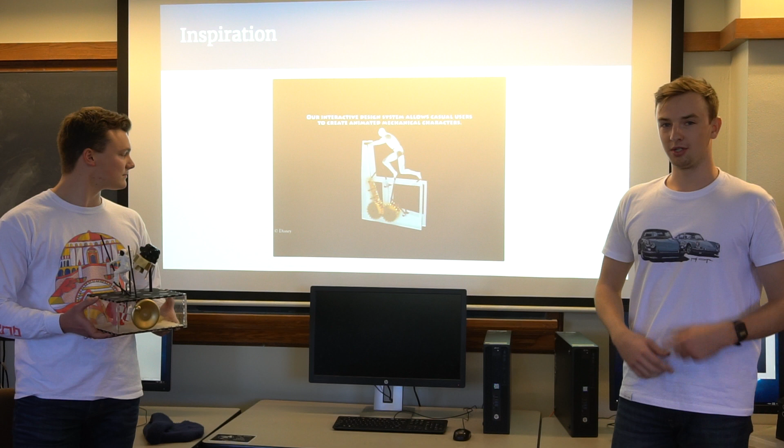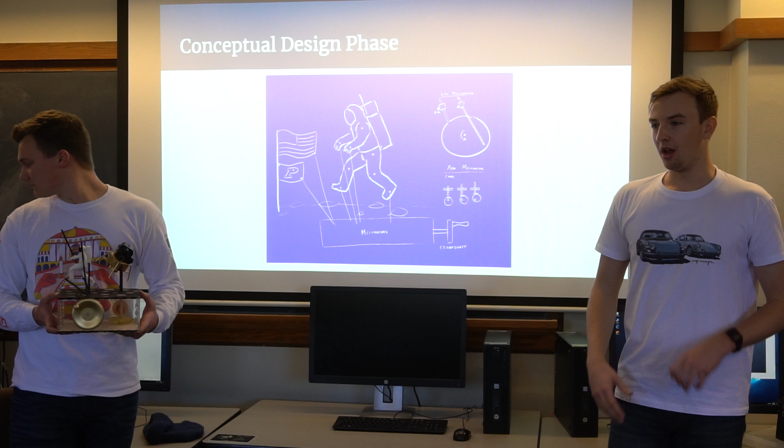So let's kind of start talking about where we got our inspiration from. There's this awesome Disney mechanism YouTube video that you guys should watch the full thing of, where they create really cool actions based on mechanisms, turning angular motion into linear motion and so on. So we wanted to replicate this, and you can go to the next slide. We wanted to replicate this type of motion and create an astronaut that would leap across the moon.

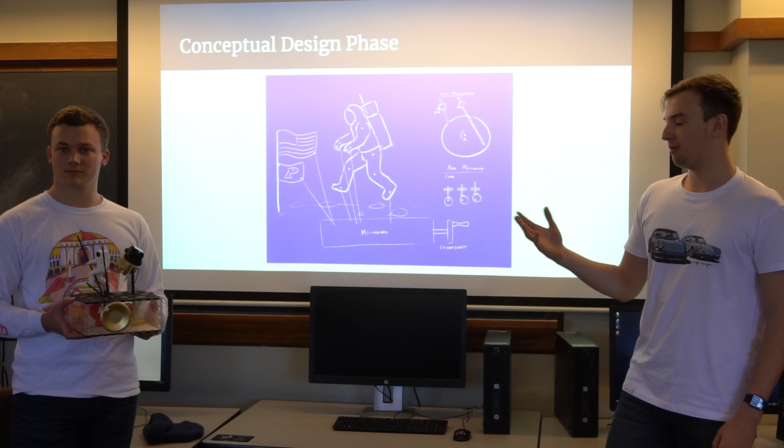So what we did was we kind of came up with some ideas, sketched it out on paper. We wanted it to look sort of like this, and then we'd have this mechanism box underneath which would hold all the parts that would create this motion. And then we also added a lunar module that rotates in the background as if it was taking off. So next slide.

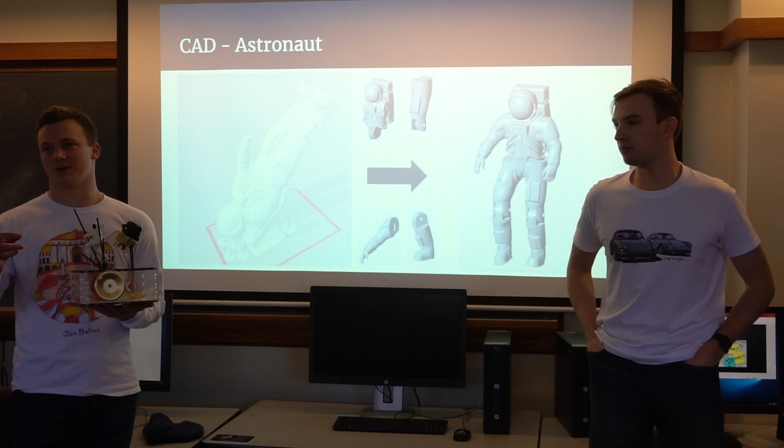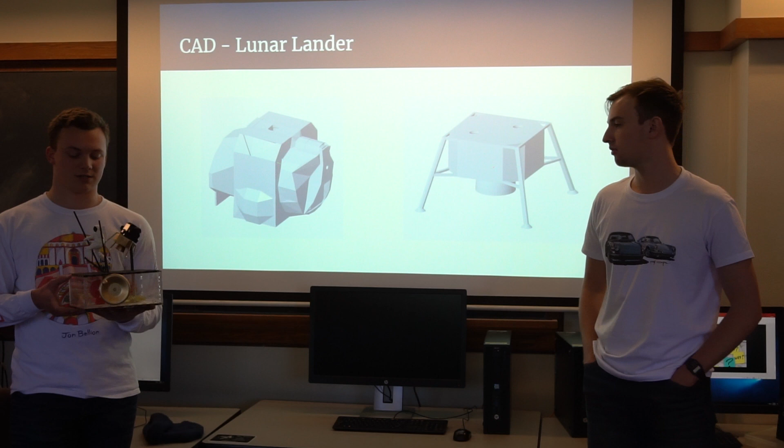So what we did for the CAD of the astronaut was we found an STL file which was open source, and then quite heavily edited it. We had to take apart the different joints and remove the supports, and then we printed the joints separately from one another and attached them into the assembly that you see here. And then the lunar lander was a similar situation, open source, and we made small changes so that it would fit on our model and move the way we wanted it to.

And so here's a basic assembly of our toy. At the moment, it currently does not have an animation to it, but we are working on that for the final toy presentation next Monday. And so what you see here is rods connecting the arms and the legs to a hidden crankshaft inside the box. And on the right face of the box, you see a red lever. You turn that lever, it turns the crankshaft, moves the rods. The astronaut is animated like he's walking on the moon. And at the same time, the lunar lander in the background is spinning.

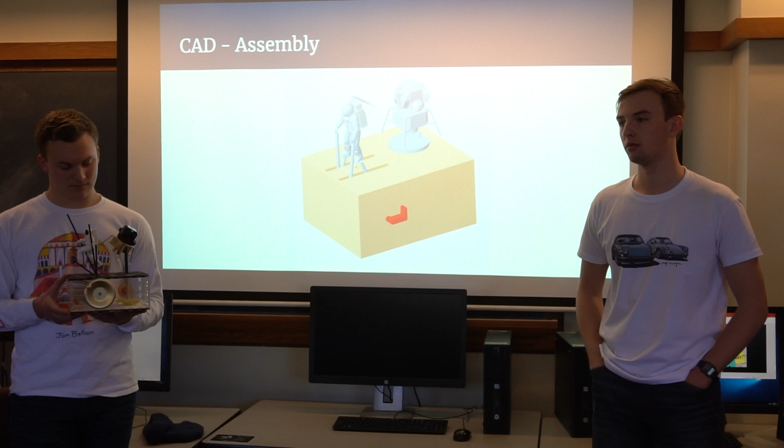So once we finally had everything modeled, we went to 3D printing. We did the lunar lander and a few other parts with SLA 3D printing. And once we ran out of the volumetric limit on that, we used FDM to do the astronaut parts. In addition, we used laser cutting for the box that houses the crankshaft. We decided to use 1/4-inch plywood for the top and the bottom, and then for the sides to use clear acrylic so that you can see the crankshaft and see how it moves. It also kind of gives the kids who play with this an inspiration for mechanical devices.

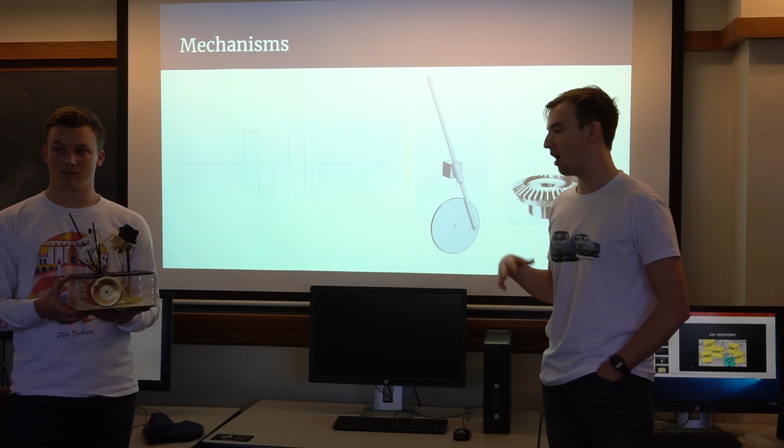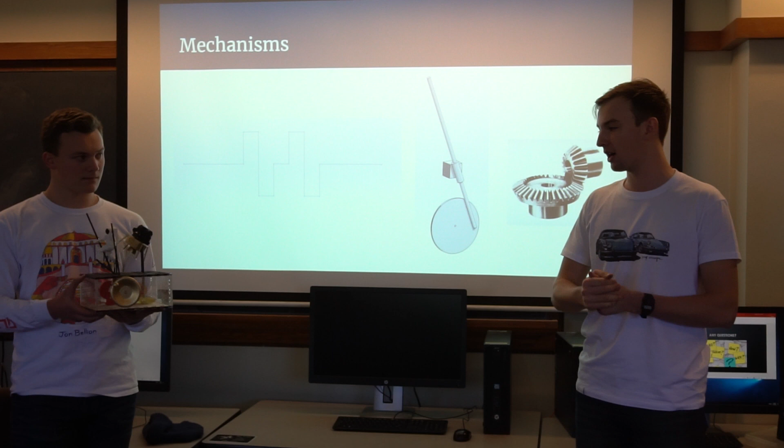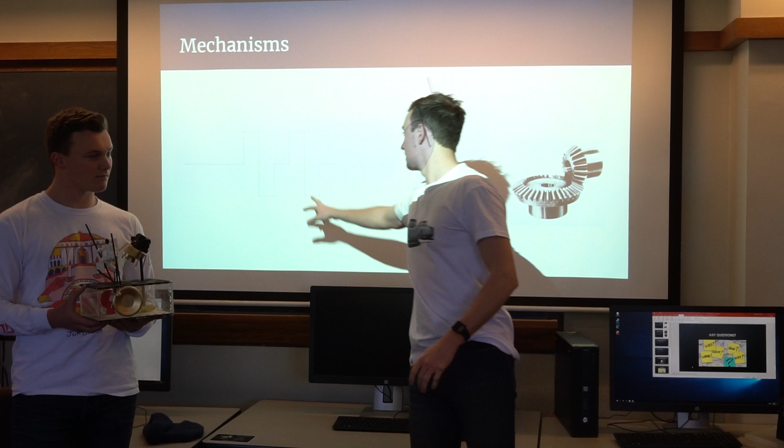So we'll talk a little bit about the mechanisms. First, really quickly, you have an input source, which is the user or the child, who rotates the handle or disc, which is on the outside of the box. That in turn rotates a crankshaft. So the way we designed it here is the two inner cranks here control the arms. When you walk, you have opposite strides, so we wanted the arms in opposite directions. These two in the middle, and then the two on the outside operate the legs. And obviously, when you walk, your legs are in different strides, so they're going to be completely opposite one another.

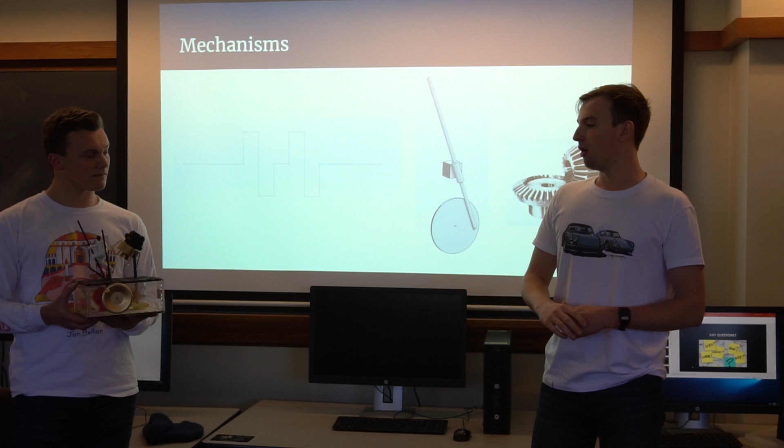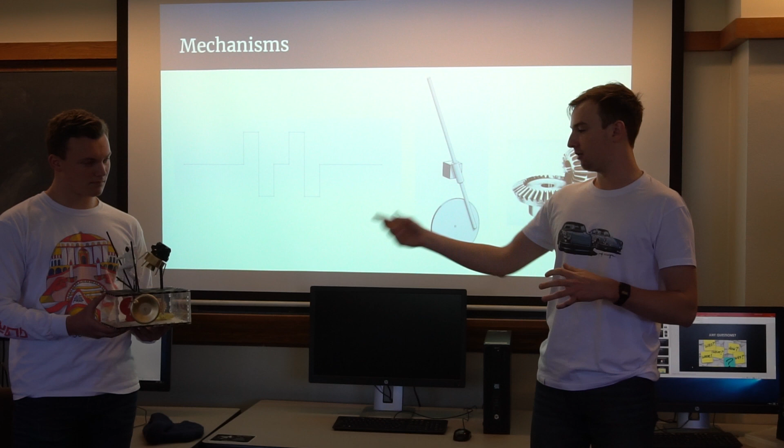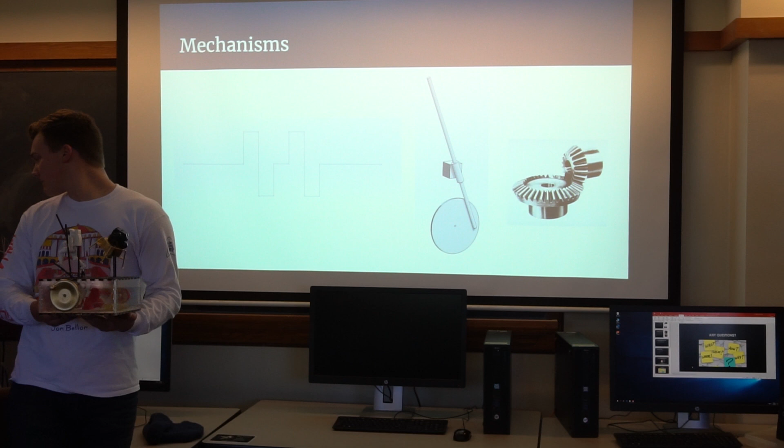So then based on that rotation about the center, it moves almost like a piston in a car, up and down, which then moves the arms and legs in a skipping motion. Now, that crankshaft is also connected to a pulley system. The pulley system then rotates one of these gears, translates the angular motion 90 degrees, and then in turn rotates the lunar module at the top. Just to show you, I used SolidWorks a little bit to help visualize and adjust these lengths so I could figure out the proper radius, and it moves in that action.

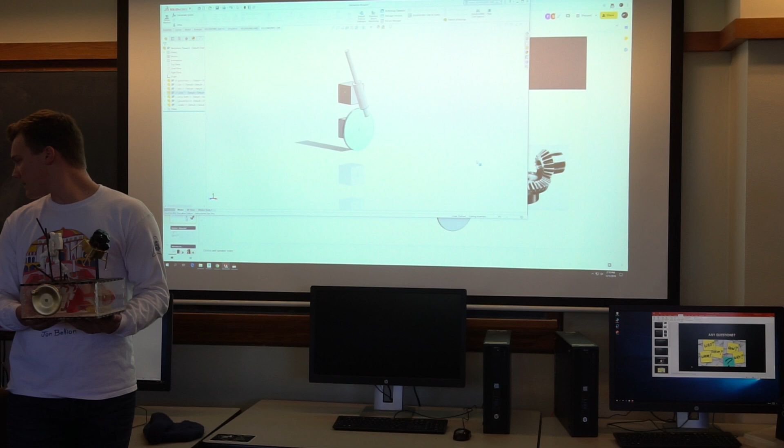Next, we're going to talk a little bit more about the skeleton model. Right, so as we were learning in class how to make skeleton models, we decided it would be a good way to model our mechanism, figure out all the joint lengths, and then adjust them as needed as we continue to make updates to the prototype.

So we made a complete skeleton model. We put in all the joints and connectors between them. It's a three-dimensional skeleton, which also has working mechanisms for a cam follower, for the slider joints, for the bevel gears, and for the pulleys. We are facing some issues with this model.

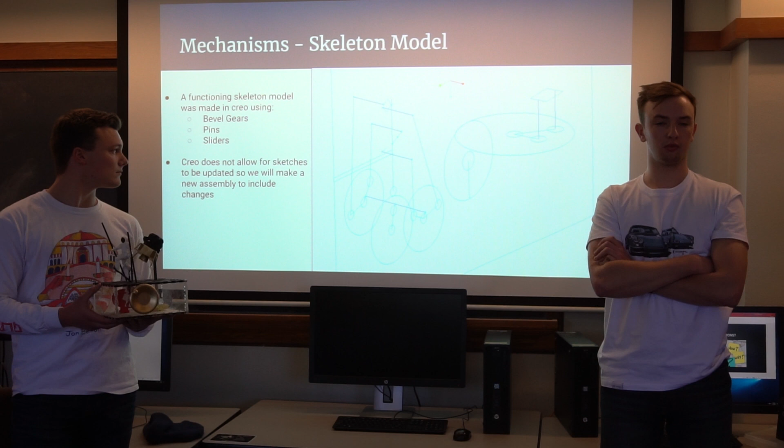We realized that with Creo, once you start assigning bodies, you can't go back and change sketches without deleting the bodies. Because of that, it's very hard to make changes. We decided to get rid of our cam follower, but we realized we couldn't update the model to reflect that. So because of that, we're going to move towards a normal CAD assembly for our final model that we submit.

But we have made the skeleton model, and we used it to help figure out how all the joints would connect and what lengths to use and whatnot. So it was a pretty useful skeleton model.

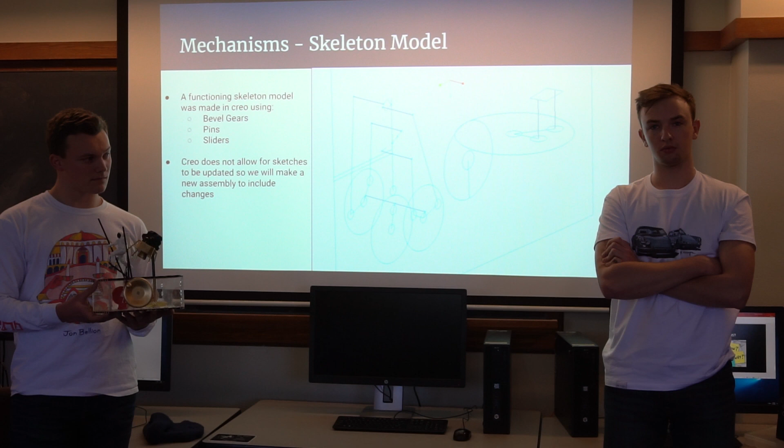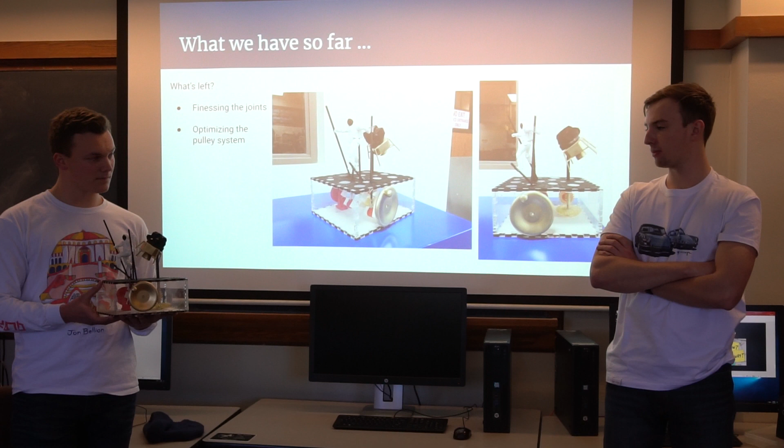And then what we have so far is we have a prototype that looks pretty good. It's got everything assembled. And as you can see, we've got it painted and designed and printed. We have everything there. The crankshaft is attached. We have 4 slider mechanisms, the pulleys set up as well, and the bevel gears.

The current work that we have left is we need to finesse the joints. They're pretty stiff right now. There's more friction than anticipated on the sliders, and the lengths are a bit tight. So we need to work on adjusting them so that it properly flows smoothly when you rotate the handle. And we also need to optimize the pulley system.

It tends to slip a bit, so we're just going to experiment with different bands, and we're going to maybe add a support to the pulley joint just so that it manages torque well. And once we have both of those down, we should have a smoothly functioning model.

Yeah, thank you. Any questions? While we take questions, Sam will walk around so you can look inside.

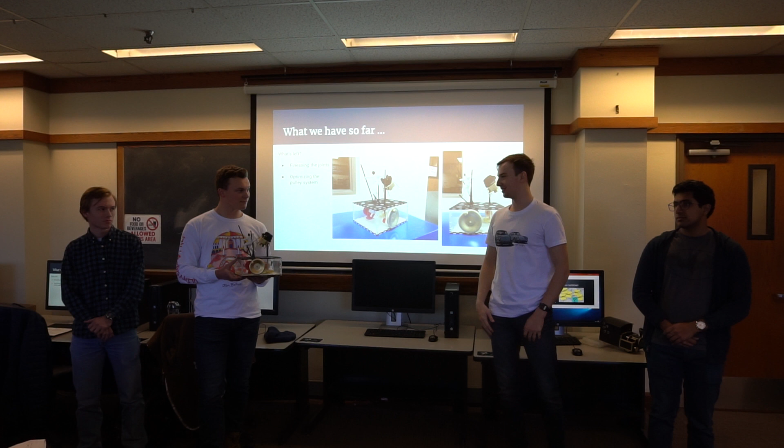Question over there. So when you're figuring out the limb length, did you have to calculate how much it's gonna move, or did you just trial and error? So what we actually ended up doing was that we have a slider. So the foot is connected to a dowel rod. All the limbs are connected to dowel rods, but they're not rigid joints, they're sliders.

So we put full length dowel rods and we connected everything, and then we cut them down to the maximum length needed. So it's actually a dynamic length, and adding that degree of freedom means that our machine is less likely to get stuck when we're rotating it, because it's got more degrees of freedom than you need.

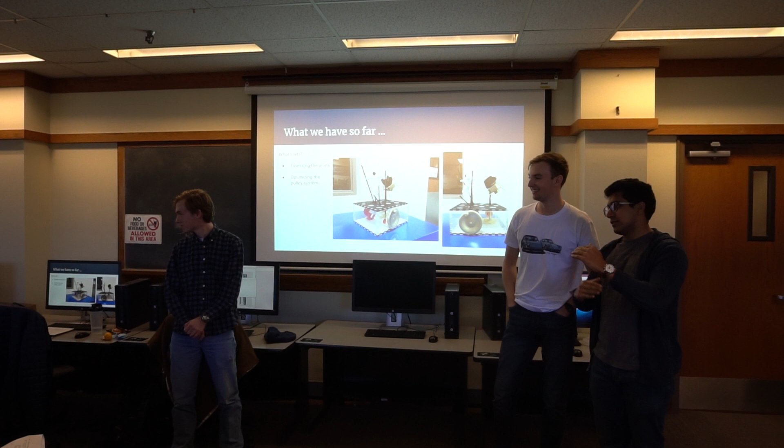You mentioned that you use the skeleton model and you cannot go back to change the sketch dimensions. So we can change the sketch dimensions, but we can't change some of the types of joints. We can't turn our slider into a pin joint or into a normal fixture without deleting the bodies and then making them again and redefining every single mechanism or every single joint.

You can redefine it, though. Well, it wasn't giving us the option. I mean, we can have a look at it, but it was definitely being very unreasonable.

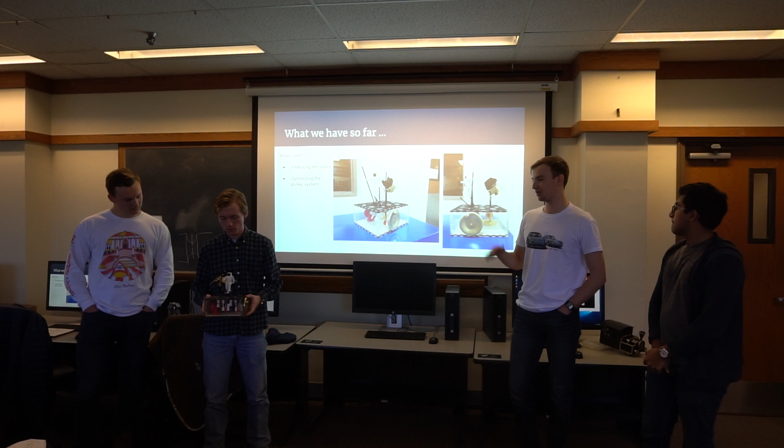What do you think is the main reason for the current problem? I think there's just so much friction on it, and it's not a design issue. We have a skeleton model which works, so theoretically, it should be working. And we did all the machine design based on it, but it's a very complex mechanism, and so if there's a little bit of an angle off...

If you take the camshaft off, can you rotate here to get the trolley to work? Oh yeah, without the astronaut on it, it'll do that. I'm talking about this rotation. If there's no camshaft here, by rotating this, will it be able to rotate here?

Yeah, so actually we put the astronaut on last, and we were able to get this to spin. Okay, as long as this shaft can spin this portion of it. Right, exactly. So what you need to fix is this here. Yeah. We need to fix the crankshaft. So the lunar module does spin when it's not connected to the astronaut.

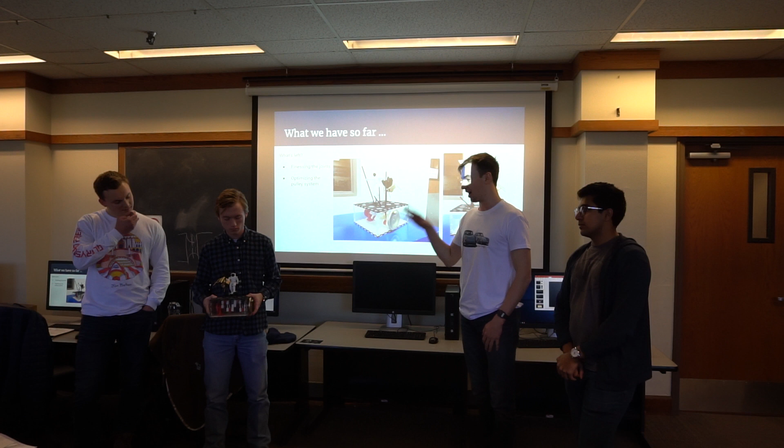It's just all the tolerances and stuff. It's a lot of moving parts, and a lot of friction. Okay. Yeah. Thank you for bearing with us. All right.